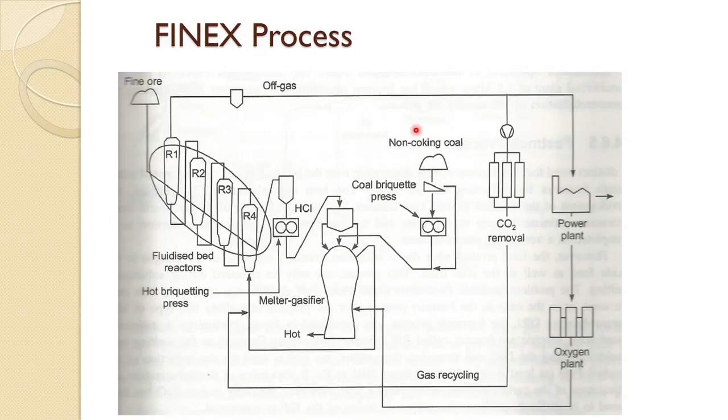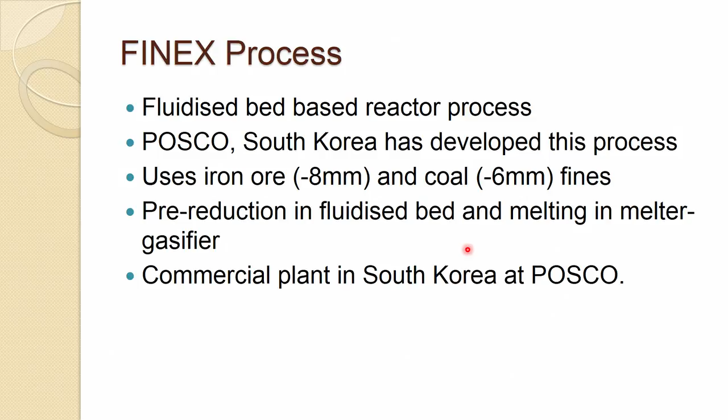Another one is the HISMELT process. So, if you look at this, certainly the COREX process is a commercialized one and many plants are operating. FINEX process is on the verge of commercialization; one commercial plant is there at the moment, but some other is also coming up soon. Beside these two, no other process has a commercial plant.

Now, HISMELT is a promising one. This was started by CRA Australia a long time ago, and then Germany and USA also joined later on in the development of it. This is again also based on fine iron ore and coal. So, pre-reduction up to FeO in a fluidized bed, melting in a melter gasifier converter type process, uses fine iron ore and coal, and a pilot scale plant is there.

And this HISMELT, they have a pilot scale plant in Australia in Kwinana, but this technology has now been taken by Tata Steel and others, and they are putting a sort of new version of the process called HIsarna, which uses a cyclone converter furnace and has a pilot plant at Tata Steel IJmuiden. So, both processes have quite a lot of similarity, because this is the upgraded version of it, using a cyclone converter furnace, which was used in one of the smelting reduction processes, but it is not commercialized yet.

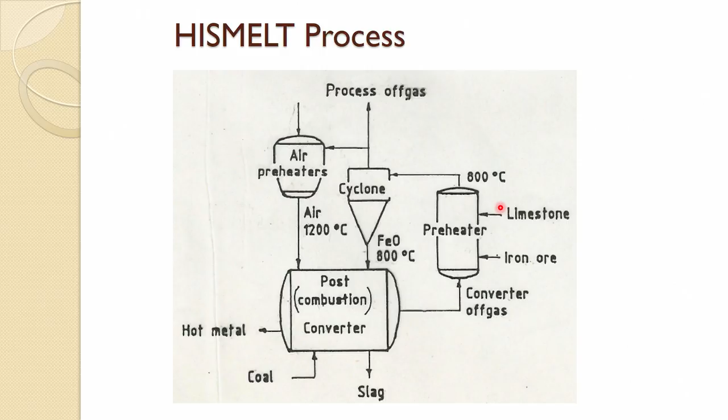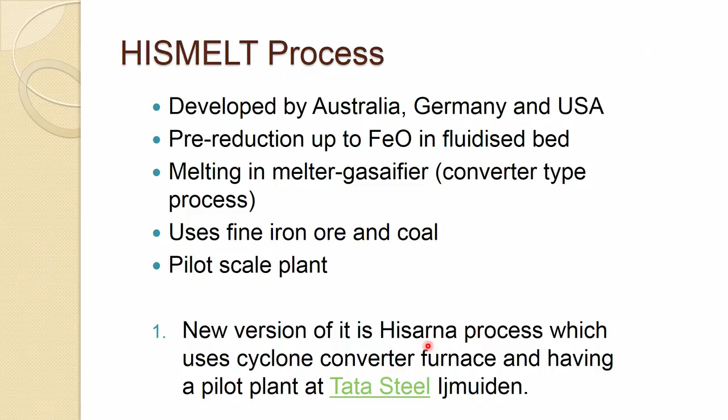So, most of the reduction up to the FeO stage occurs in this, and these fines later on are fed into the converter. In this one post combustion occurs, and it is a very integral part of the process. So, this is a sort of flow diagram of HISMELT, and similar for HIsarna, but it has a cyclone converter furnace, and they are still in a development stage, not commercialized yet.

So, in brief, if you look at the overview of new iron making technologies and their output, this figure summarizes it in a very good way. At the conceptual and laboratory stage, the electrolysis process came, and the processes which have come up to the pilot and development stage are HISMELT which we talked about, ROMELT, HIsarna, Tecnored, and all this. The processes related to these are smelting reduction and blast furnace related, so they produce hot metal, and the processes at the bottom are related to DRI, HBI or sponge iron, which produce solid iron. So, these two curves represent different things, hot metal and solid iron.

In the hot metal one there is AISI, the American one, DIOS, CCF. These are the processes, and on the other end for DRI, Circored, Danarex. These are there, but really none of these are in operation now. The yellow one shows coal based, blue shows natural gas, and the black one shows coke usage. Some of these processes have been discontinued; the red marks show discontinued.

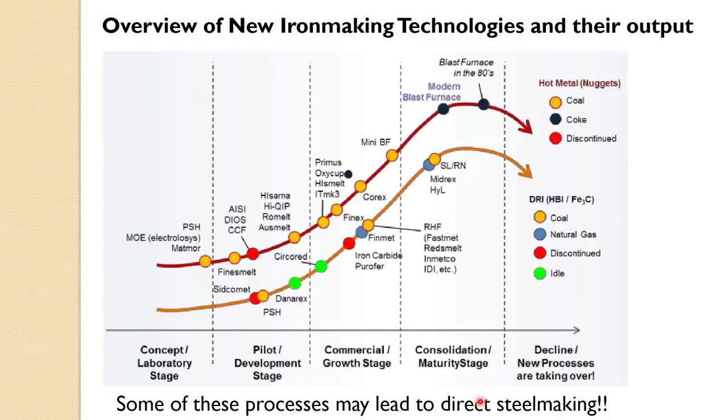Then the processes which have reached quite a mature stage are the modern blast furnace and the blast furnace of the 80s. And then you have SL/RN, Midrex, and HYL. These again are all commercial matured processes. So this summarizes most of these processes: some are already matured, many are commercialized, and some are on the verge of commercialization. And some of these processes may lead to direct steel making, hopefully.

So this is about the alternative routes of iron making, and we will talk a little bit about the energy and environment related issues in the integrated steel plant. I will touch upon these briefly, because this is also a small part of this course and one should understand it.

With the growing global warming problem which is happening, we also have the responsibility to understand the energy and environmental related issues which integrated steel plants are facing, and we should probably contribute in reducing it. So okay, we will start with the energy consumption in steel production by various routes.

Now there are always quite a lot of arguments that the blast furnace is quite energy intensive. If you look at this table, production step process: blast furnace, basic oxygen furnace to make the steel. Smelting reduction, you get the hot metal, basic oxygen furnace. DRI, where you have solid iron, melting it in an electric arc furnace. Another is you already have the scrap and melt it in an electric arc furnace to make steel. So these are the four routes.

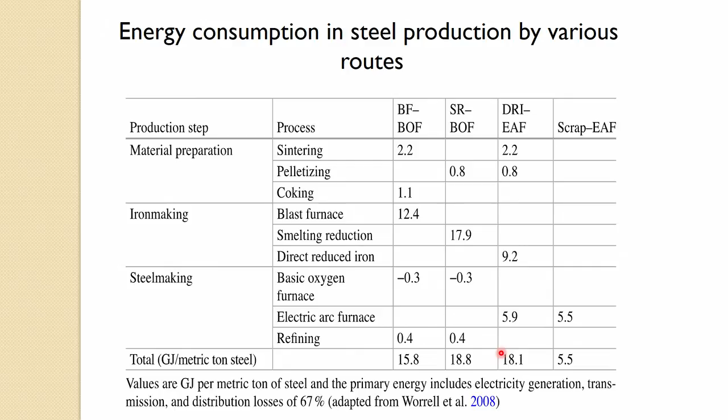So if you look at these main three routes of steel making, the blast furnace BOF route is still very competitive and takes quite low energy. We still have not addressed the energy issue in this way, and that is one of the reasons these processes, though in existence for long, are unable to compete with the blast furnace BOF route. This gives you a summary of the various routes of steel making and how much energy is used in these processes.

Now, we look ahead. It seems there is no real possibility that we could do without steel. At the moment, no other material is available which can replace steel in the near future. Major iron and steel making processes, blast furnace, BOF, EAF, continuous casting, etc. are quite mature now and have little room left for improvement. New methods will be needed based on fundamental, technical, economical and ecologically sound principles. Because so much energy is used and most of the reduction comes through coal in one way or another, it produces greenhouse gases, and that is where global warming comes in.

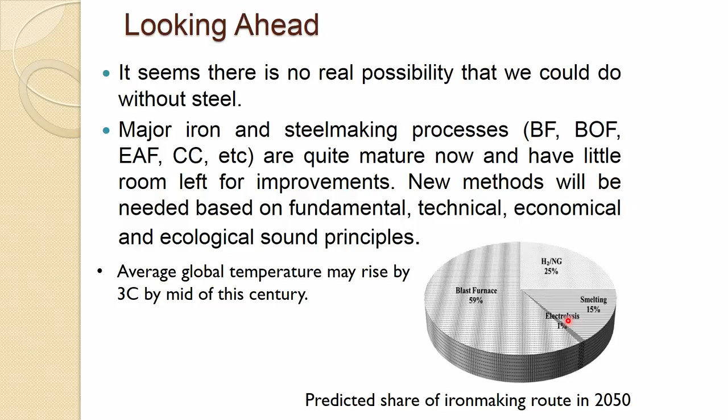Average global temperature, it is predicted, may rise by 3 degrees Celsius by the middle of this century. And there is a prediction of iron making routes by 2050 that the blast furnace would still be dominating, maybe about 60%. DRI natural gas reduction may go to 25%, smelting may go up to 15%, and a new promising process, electrolysis, may go to 1%. Efforts are being made to produce iron by electrolysis, but this would be possible only if electricity is generated without coal, in a clean or renewable way.

There is lots of talk about greenhouse gas emission by the steel industries, so I would like you to know what it means. A greenhouse gas is a gas that absorbs and emits infrared energy. The primary greenhouse gases in the Earth's atmosphere are water vapor, carbon dioxide, methane, nitrous oxide and ozone. You know the ozone layer is around the Earth, and that is what keeps us a bit warm. These gases do not allow the infrared heat emitted by the Earth's surface to leave the atmosphere, creating a greenhouse effect and temperature rise.

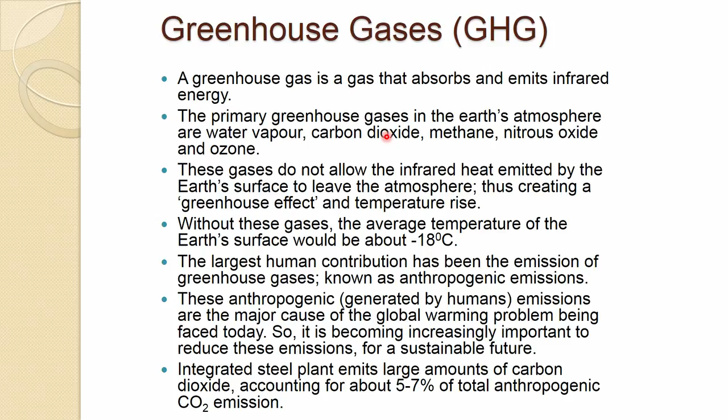So, globally by the middle of this century, a drastic reduction has to be made in greenhouse gas emission, and those who lag behind may perish. Very stringent rules have been made, and recently the Paris Accord is there on the environment. So, if industries do not follow this, they have to shut down, and in fact many of them are shutting down due to violation of greenhouse gas emission rules.

So, in future the most important emissions in the iron and steel industries would be CO2, dust, dioxin, NOx, nitrous oxide and mercury. In order to reduce CO2 and other emissions substantially in the iron and steel industry, there are three possible routes: carbon capture and storage; use of an alternate reductant like hydrogen or natural gas. Natural gas still has the problem of reforming and again producing CO2, so hydrogen is a possible one; or the electrolytic process, which we just talked about in the previous slide, if electricity is generated in a clean way. This is the important aspect of it.

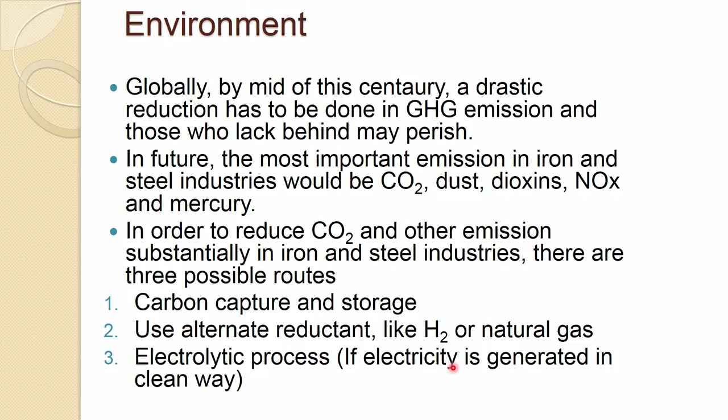So, besides that, there is another possibility: COG, coke oven gas, and BOF gas. You can combine them to make a syngas, and by using the Fischer-Tropsch reaction you can convert it into useful liquid products, hydrocarbons, petrol and the like. That way one can also capture the CO2, or carbon essentially. So, lots of efforts worldwide are going on to reduce CO2 in steel plants, and various technologies are being developed.